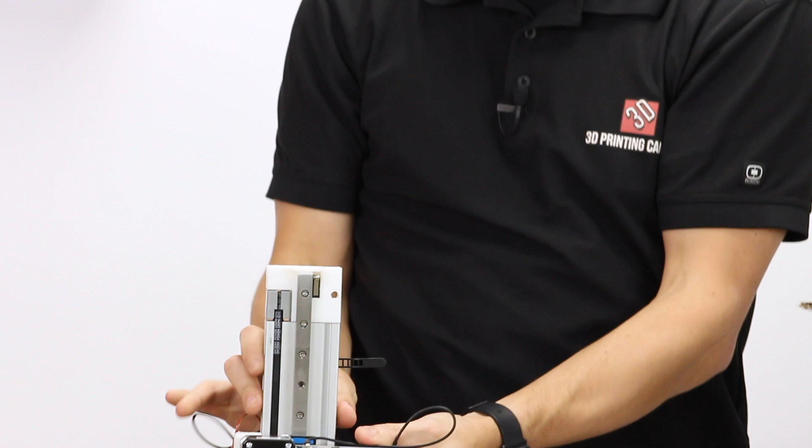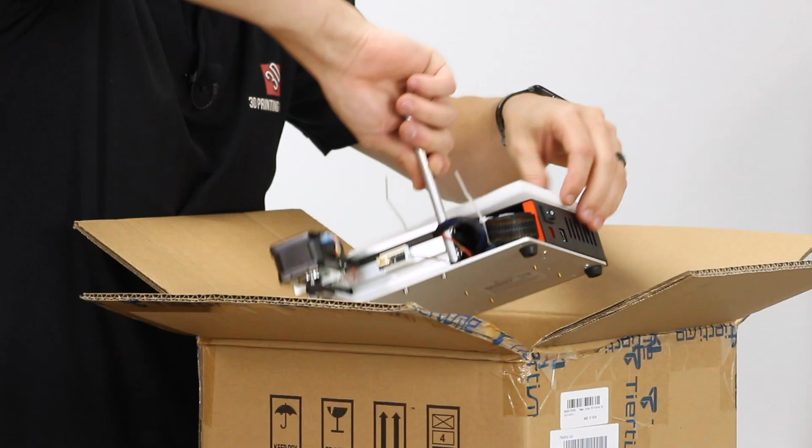All right, so this is kind of that cantilevering. So this would be the Z like this. And you'll notice that there's linear rails on both the Z and the X. It's pretty heavy. And this will be the rest of the base. Obviously that's the control box. And again, we have a linear rail on Y. So everything is linear rails, we have no V-slot wheels or anything like that here. And that's the end of that.

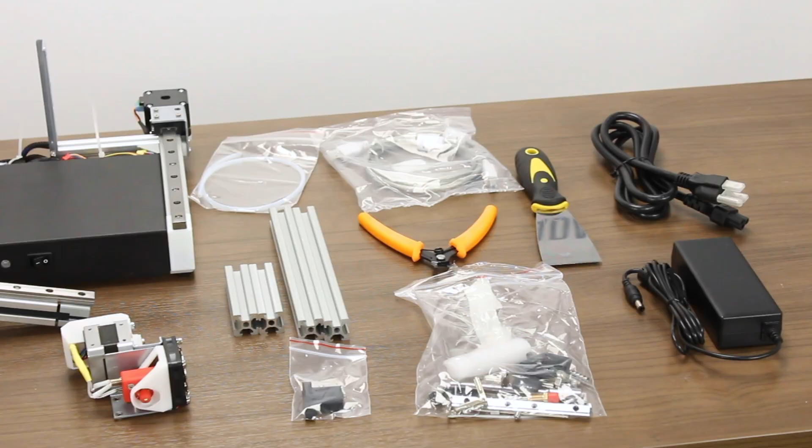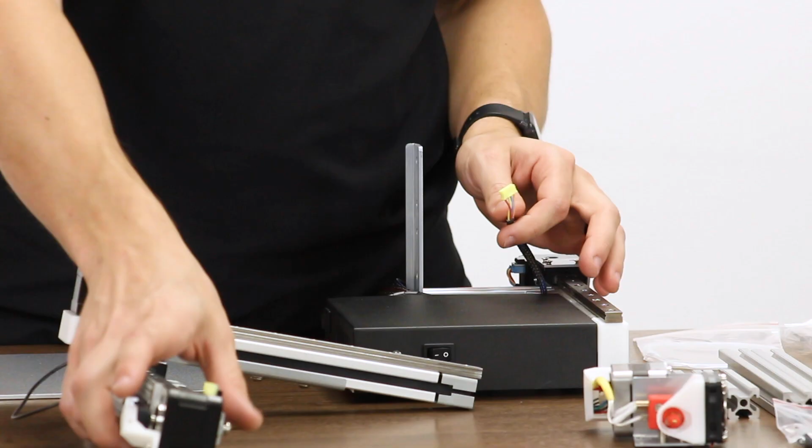So I've cut the zip ties that were holding all of these wires nicely bundled in little coils at the back here, the longest being the one that's going to reach the hot end. It's this ribbon type connector, so that's pretty obvious. But what we're looking for is the Z motor cable. They've nicely actually color coded this. So the Z motor on this assembly here is this guy, and it's yellow, and this one is yellow here. So that is going to go into there.

So on the Z axis here, there are 3 screws loosely screwed in here, and those correspond to 3 holes on this upright bracket. So we're going to use these screws to attach this to here. Make sure that you're not pinching any of these wires between this upright piece and this piece here. So to do that, I'm going to need some of these Allen keys, I guess.

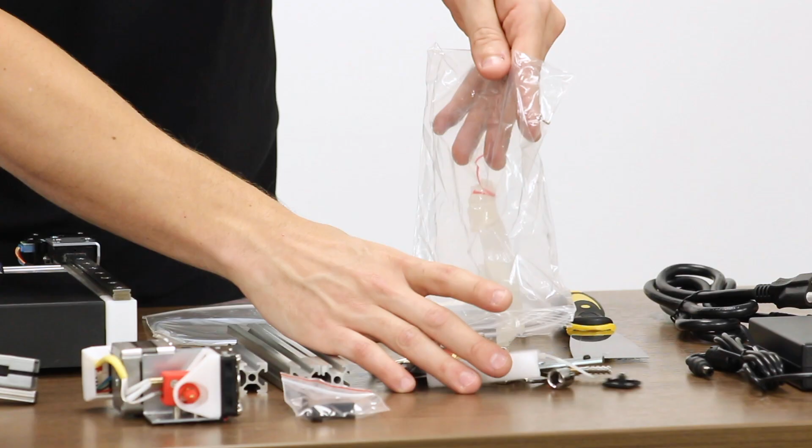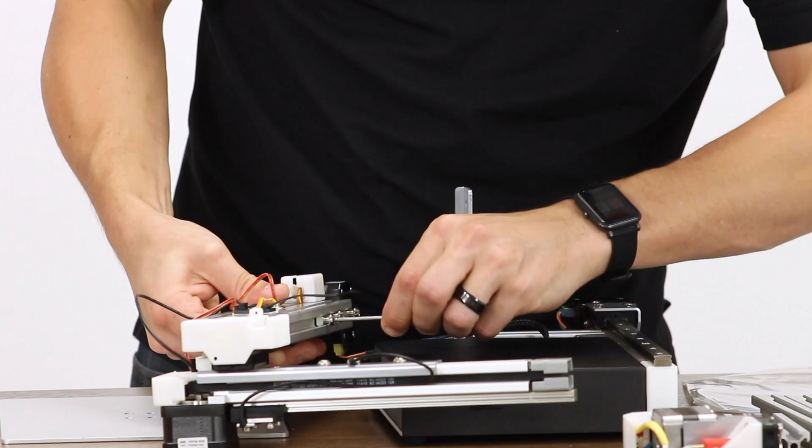Quite a few little parts in this bag. Oh, that's kind of nice, they give you a little wrench for the hot end, the nozzle I mean. Well, what we're looking for is this one. So I actually don't need the Allen key out of that parts bag because these are Phillips head screws. I just immediately assumed they would have been hex head.

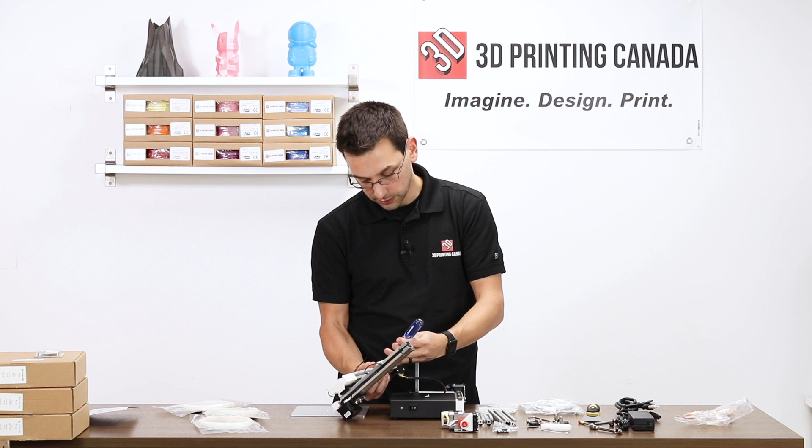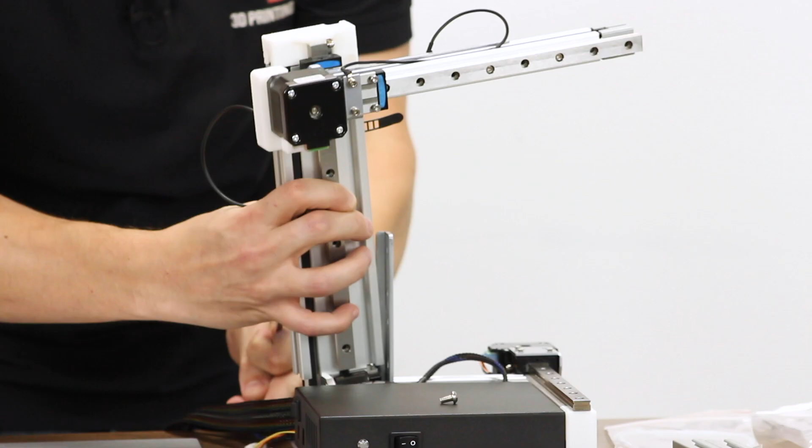So remove the screws from the upright. I'm following the instructions verbatim. It would have probably made more sense to attach this first before attaching the cable to the motor. Though getting your fingers in there to attach the cable afterwards would also be pretty difficult, it's pretty close quarters. Okay. So as I said, you got to take some care to make sure you're not crushing any cables underneath there.

All right, so I've got that connected. It's good and sturdy, that's for sure.

So the next step, it says we need to take this red cable and plug it into the Y motor. The Y motor is already connected. So what they actually mean is the X motor, and we know that for sure because they've color-coded it like the other one. So it does say to route it through this little plastic bracket here.

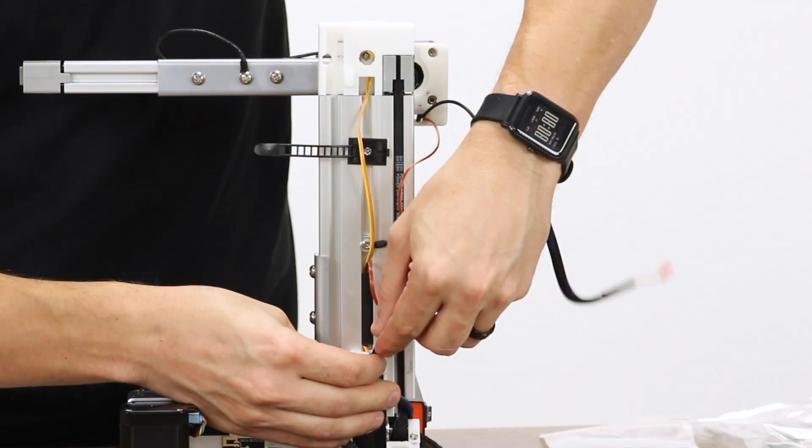And then connect it just like that, I guess. Right now the Z is basically all the way at the top, so we know that that's as much slack as it's going to need, and then as it comes down it will just kind of fold over on itself.

So now they say to connect the YZ end stop cable, well that's got to be this guy, it's the only one we have left, and it's going to connect to this little connector at the bottom of the printed bracket here.

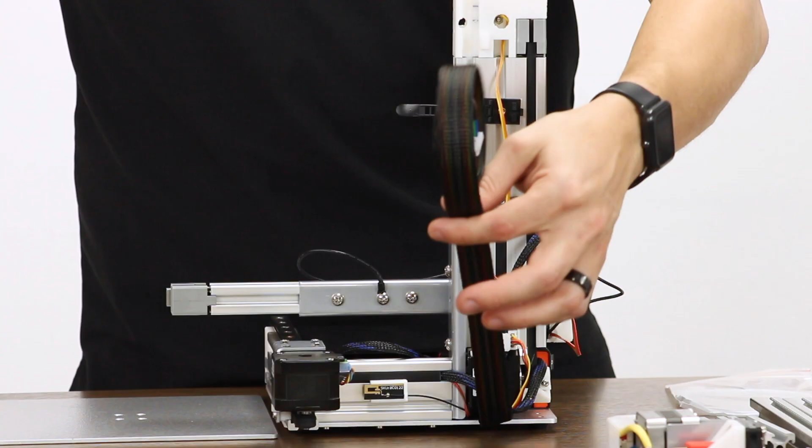There we go. So the next step is we're going to route this ribbon cable here. You need to slide it underneath the Z motor, and then it says to run it up here and use this cable tie to kind of cinch it.

There we go. And it doesn't need to be tight or anything, you're just doing that to stop it from kind of folding over on itself.

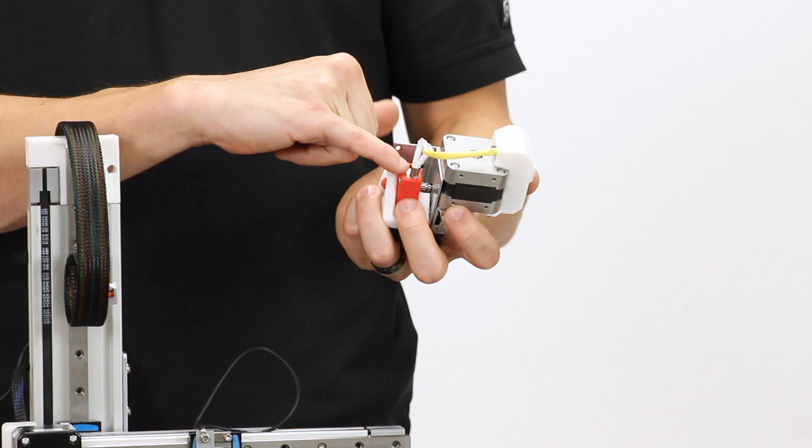So now we're ready to attach the hot end to the X carriage here. So there's just these two hex bolts, and they're going to bolt through these two holes in this metal back plate. Looking at this a little more closely, it's interesting how far out both the thermistor and the heater cartridge stick.

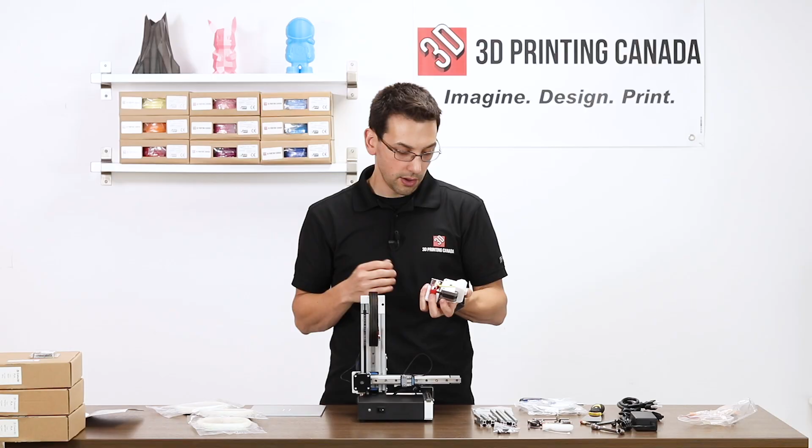I'm going to assume they're pushed in the correct amount, so they just may be longer heater cartridges than we're used to. And there seems to be some sort of a paste, maybe it's boron nitride or some sort of high temp thermal paste to help with that heat conductivity.

So as I said, two hex bolts, and just bolt through these two back holes in this bracket. You may need to manually lift up the Z. It will sag on its own over time, but otherwise you won't have the clearance necessary to bolt this on.

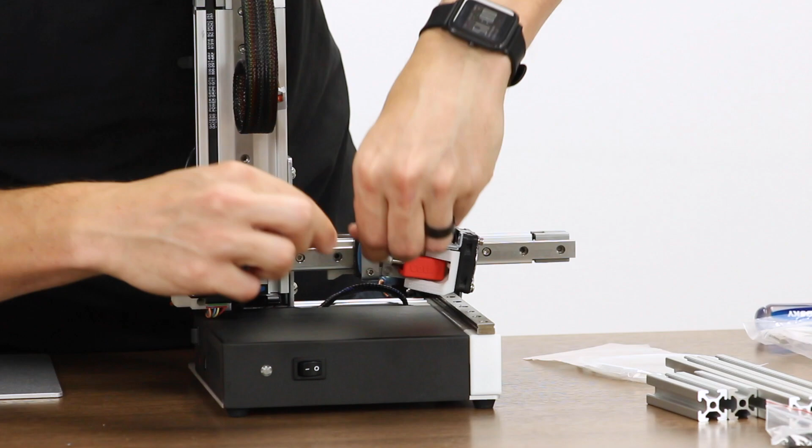All right, almost looks like a printer now. So we can connect the ribbon cable. It is keyed, it only goes in one way. Let's route it like this.

So when I connected the X motor cable, I forgot to tuck this into this little printed bracket here. So you should be able to kind of, there you go, nestle the cables in there like that. They're not going to slide out on their own.

That's fine. So the next step is to assemble the spool holder, which is made up of these 2020 pieces, but we haven't put the bed on the printer and there is no mention of installing the bed.

This is the bed. It has these recessed holes for the bolts. They're pan head bolts, or these tapered bolts, sorry. So if we raise up the Z again

and move the Y forward here, the screws are already in here. There are 3 of them. The 4th here is completely recessed into this bottom bracket, so I don't think that's to be removed. So we'll just use these 3.

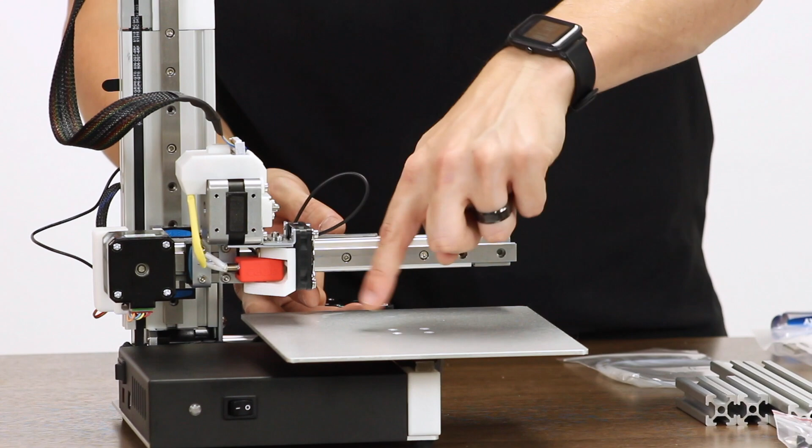And the bed's going to sit like this. So just rotate it until you can see that they line up. It is interesting that there is actually a fourth hole in the bed, but a different screw in that fourth hole.

That feels really wrong to leave this fourth hole here with nothing kind of filling the recess, but it is what it is. That other bolt is completely flush under there.

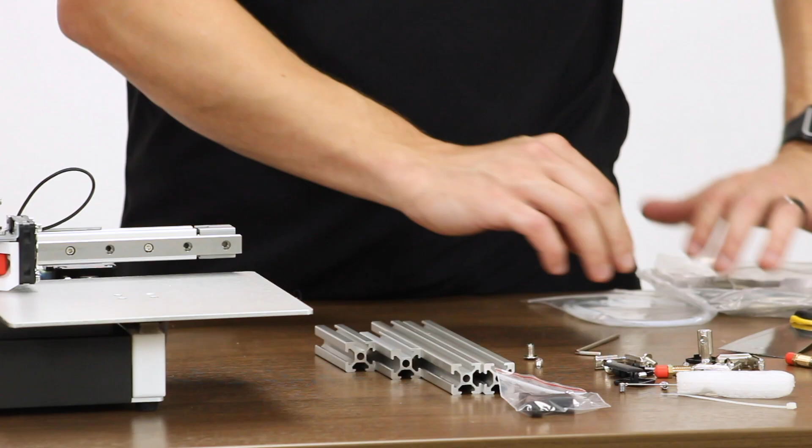So now we can move on to the spool holder. As I kind of mentioned, we've got the 2020s. We also have the caps to kind of finish off the ends of those. And then we have these little angle brackets.

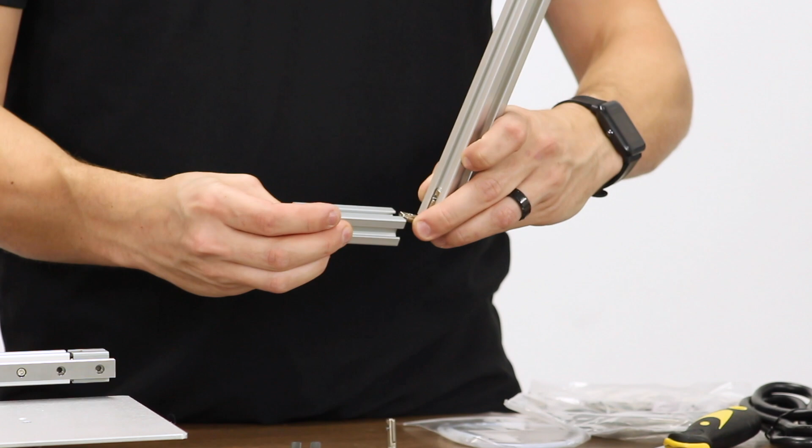So if you're not familiar with these, they slide in like that, and then you put a screw in there and that kind of pinches it between the back, the inside of the 2020 there, and puts pressure outwards. And then the other side would obviously slide into something like that for a 90-degree corner.

So the spool holder generally gets assembled like this. Put this tall piece there, put one of these pegs facing that direction, and then the other one facing the same direction. Not sure if this goes on top. Nope, it goes like this.

And so then your spool will sit on top of here. So I'm going to insert these angled brackets. That. And I should be able to just slide this one right down on top. That. And then just so they don't fall over, I'm going to bolt those on.

So we have these little grub screws or set screws. You can almost think of it as an Allen bolt without a head. And that's what we're going to use to put that pressure that I mentioned.

So I've got the main upright connected and it's super rigid. Not that it really needs to be all that rigid, it's just a spool holder. But it just goes to show you that these brackets do work quite well. So this bottom one, obviously I can't connect it like that - that doesn't make any sense, but I can connect it like this.

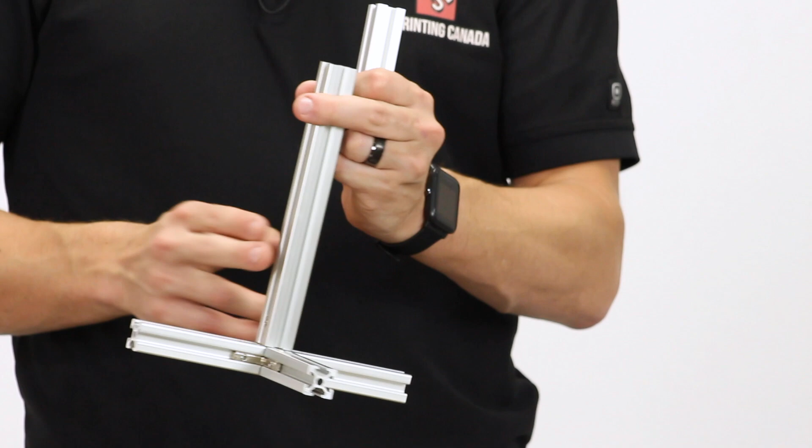And so on this upright here, I did connect two corner brackets, one on either side, but on this one, as well as this other small one, I'm just going to use one. That's all they give you, is enough to use one on those, but it makes sense that that's where you would kind of skimp, because there's really not a whole lot of force, not the amount of force that would be placed on this taller one.

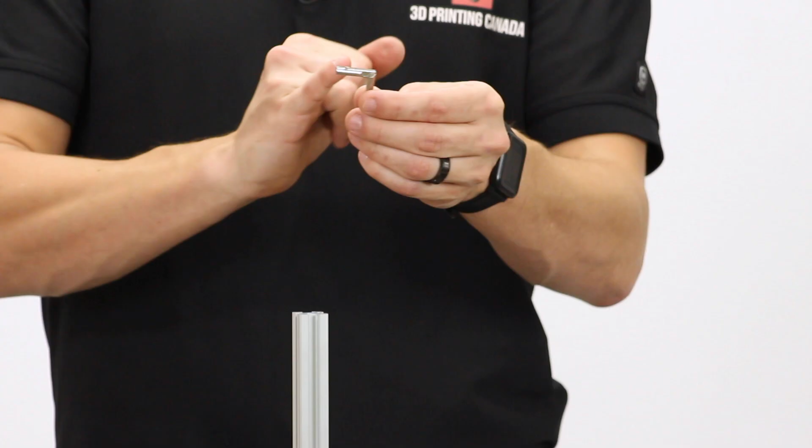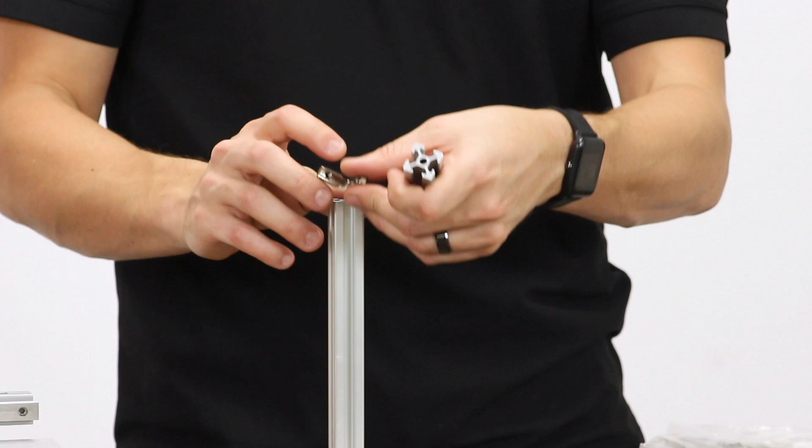Interesting - you'll notice also that there's a little notch out of here, so that allows this to slide in the end like that. That notch only exists on one side of the bracket, so I just tried to install it like this, and that won't go. So it would need to be - third time's a charm - it would need to be this way. We could also put it on the underside if we wanted to hide it a little bit more.

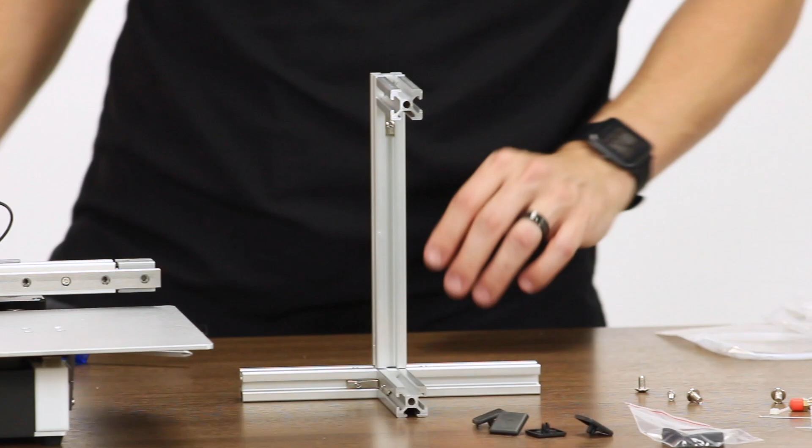There we go. So I immediately regretted all of that I said about using two brackets on the upright. While it is true that the upright would experience more forces than the rest of them, we only have enough brackets to do what we need to do. The last bracket needs to go something like this to stop the spool from just sliding off the end. So I'm gonna have to pull one of these two brackets out.

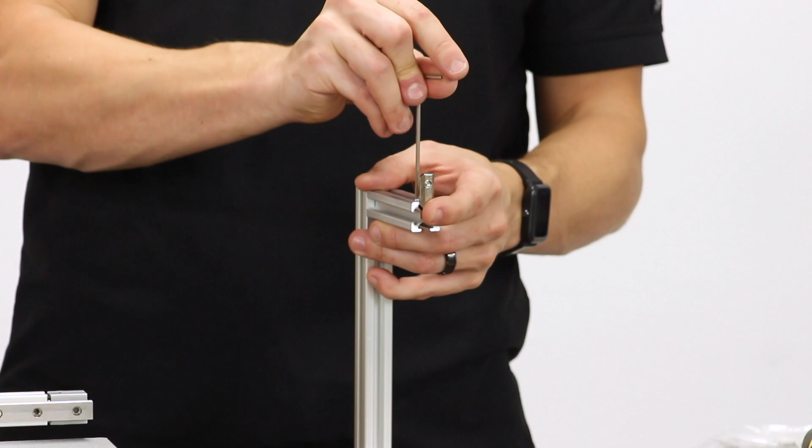So now this bracket is just going to go like that. And I guess we really don't need the grub screw in this top hole since it's not doing anything anymore, so we have an extra.

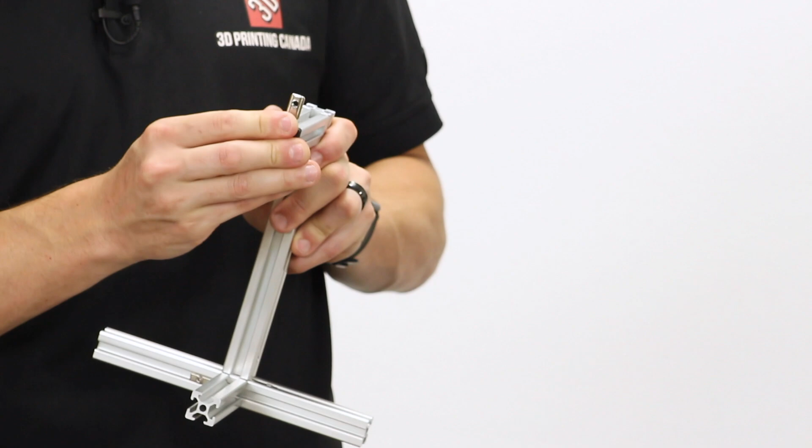So if you slide this bracket in enough, then you can put one of these caps over the end to give it a little bit more of a finished look. It should just snap right in there. There we go. And then same with the other ends.

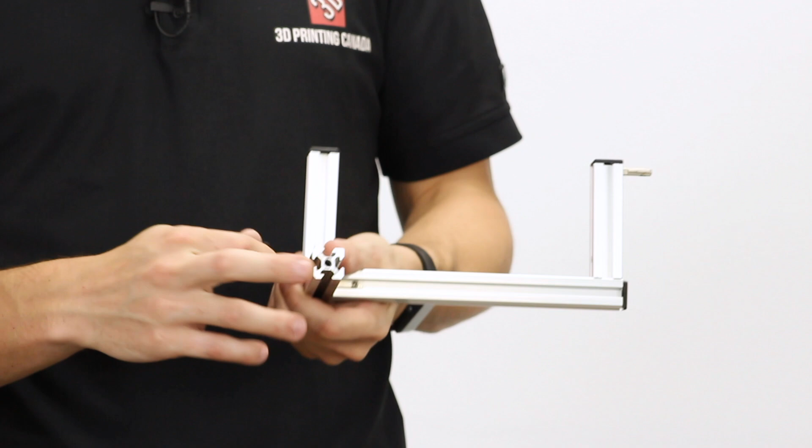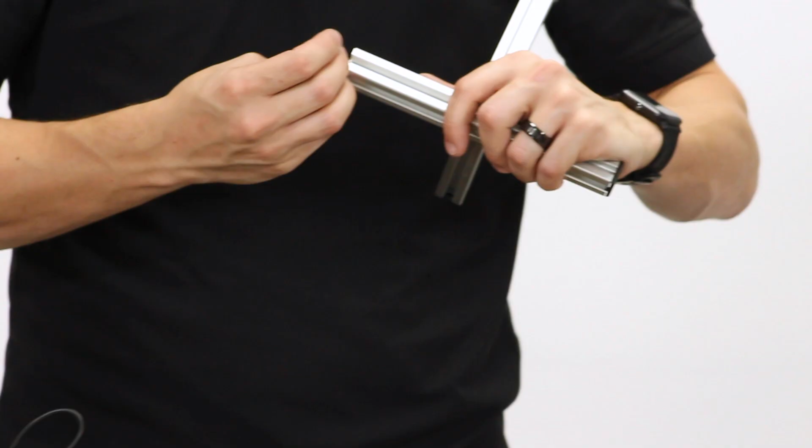So there were enough of these plastic caps to cover all of the ends of the extrusions here. What I noticed is as I got to this last one, this one hole is tapped. I didn't notice any of the others being tapped. Like if I pop this off, it's just a smooth hole. I'm not quite sure why that's tapped - it makes no mention of that at all. I thought maybe this is supposed to bolt onto here somewhere, but for now, I'll just stick a plug in it.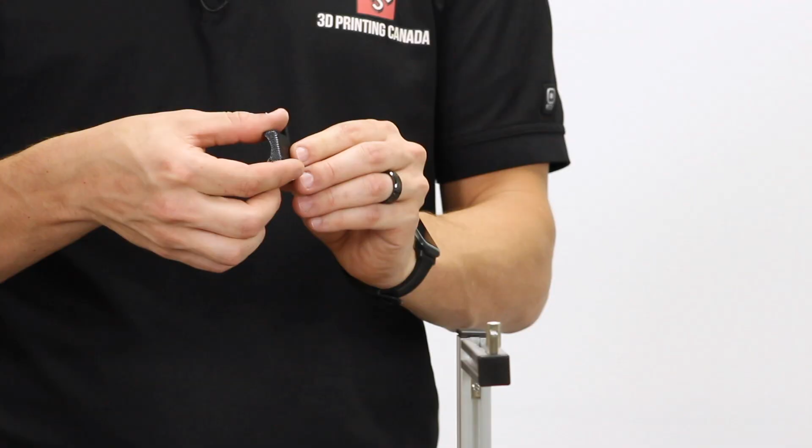So we're left with some spare parts, which is kind of always the case. But in this bag, remember earlier on, I mentioned this like curved little bracket of sorts - I'm not even sure where this goes. There's no mention of this in the parts list in the manual, and nothing in the installation instructions about it. So I'm going to take the 2 bolts and throw it back in this bag. Maybe as I spend some time with the printer, I'll learn where this is supposed to go. For now, it's a bit of a mystery.

I didn't mention it, but we also have one of these little needles for helping clear a clogged nozzle. I don't really use those myself. And in the box with the printer, there were 2 spare nozzles, one installed, so there's a 0.4 installed, and they give you both a 0.2 and a 0.6, so you can go a little bit larger as well.

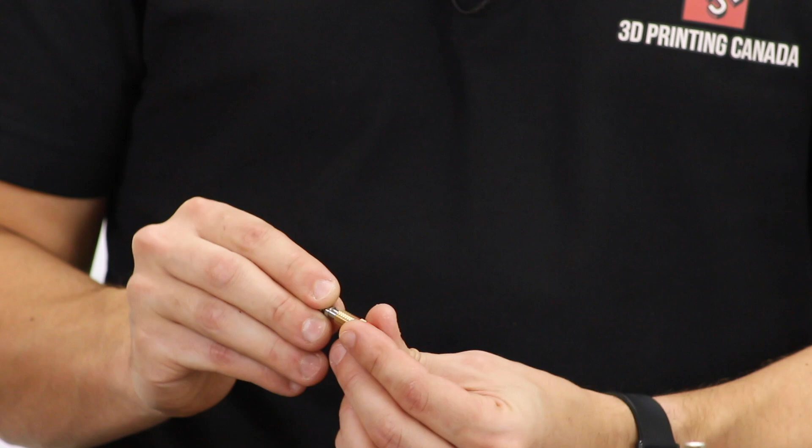So these nozzles, there - as I mentioned, there's more of the nozzle tip exposed to, say, the airflow than in another nozzle style. So they have these nice silicone boots that go right over the tip, which is kind of cool. And directly attached to the nozzle is this heat break component. It's tapered to help steer the filament in. 1.75 millimeter filament is most of our printers, but that's kind of a unique design that it's all in one.

So according to the installation instructions, that's all we need. We would probably want to be able to steer the filament into the hot end. So the filament is going to be, say, over here, probably overhand, and we want it to go in here. So that nicely fits that. There is also a spot on the back here where this can go, like this.

So it just slides into here. And then if we had the spool kind of behind, we could do it underhand and up and through. This is really just to guide the filament.

If you had some sort of a setup where you had this on a shelf up here, you could very easily just let it go down to the top, which is how I run most of my direct drive printers.

So I think I'm ready to go away for a little while, get my hands dirty with this guy, and then we'll come back and we'll review the software aspects of it, as well as my initial first impressions. Looking at the printer, it's clearly like a minimalist design. You'll notice there's no screen.

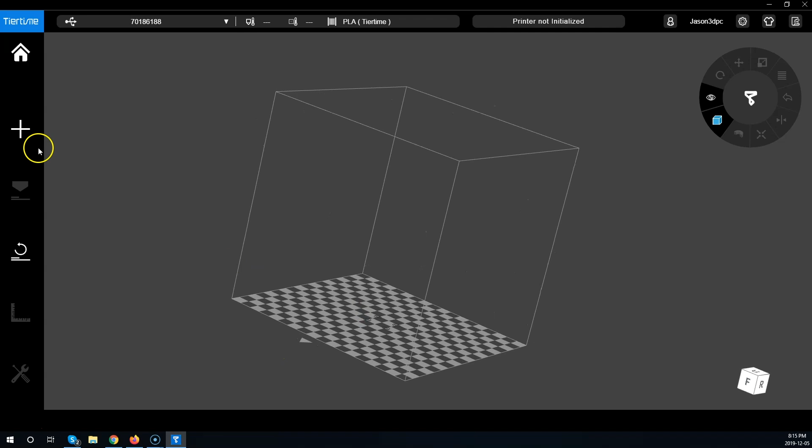And then we'll go to Up. So this is kind of your slicing environment. You can press plus and you can add a 3D model from STL or a 2D picture, or some kind of primitive shapes. So here is this guy. It's obviously going to be a little bit flat on the bottom, but that's fine. And there's quite a steep overhang there. And you can actually see a visualization of those 4 screws, so you want to avoid them as much as possible.

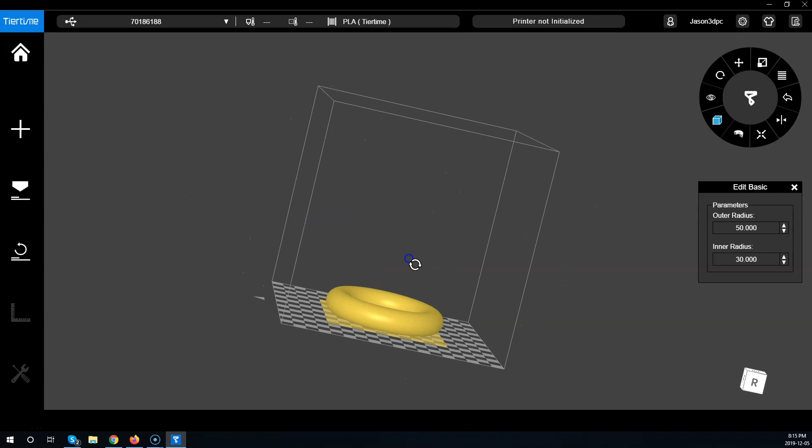We have some options over here. We can kind of view it in X-ray form, kind of thing. View it back as a solid. We can rotate them around the different axes. We can translate it or move it. Kind of all the standard tools you would expect to have are available over there.

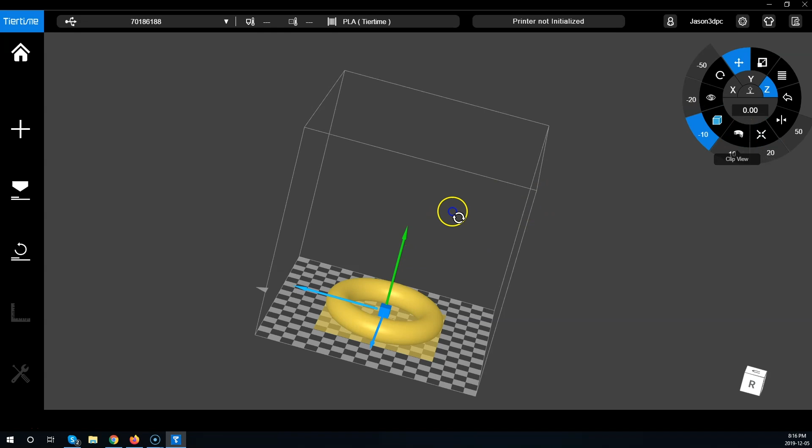And then if you're going to print, we've got some print options. So you've got quality, which is fine, normal, and fast. It's not clear to me up front what exactly quality means, whether it's slower because it's not related to the layer thickness, which is a separate metric here.

Then you kind of choose your different infill from some presets. I think this is probably more than enough, 20%. And you can choose like where the infill shows up, so you can just say no infill, you can say no infill top or bottom. There's 13%, 15%, and then 20. So we'll leave it at 20. I'll leave it at fine.

I've already calibrated the Z offset, but this is kind of how high the Z is, 182.6 millimeters. We're not going to use a raft, and we're not going to use support.

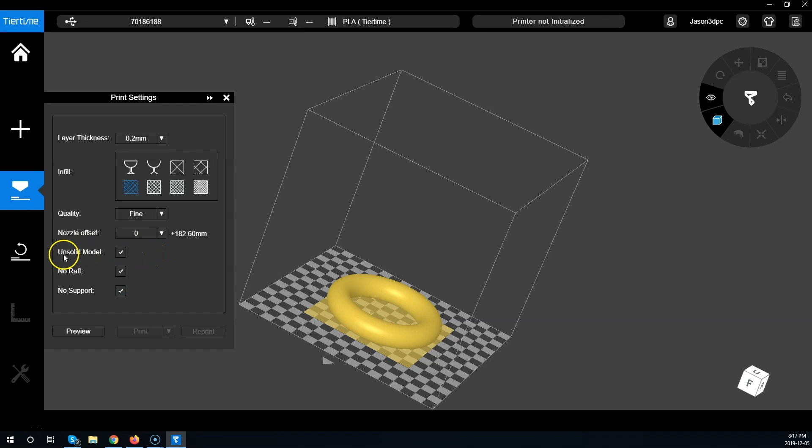Before we can actually print, you can preview it, of course. Before we print, though, you need to initialize the printer because it doesn't know where the head is right now. So you can hear that beeping, and it will actually home all the axes. So it'll move all the way to the top, which is homing the Z. 0 is actually at the very top, really, and it'll home the X and the Y, the build plate.

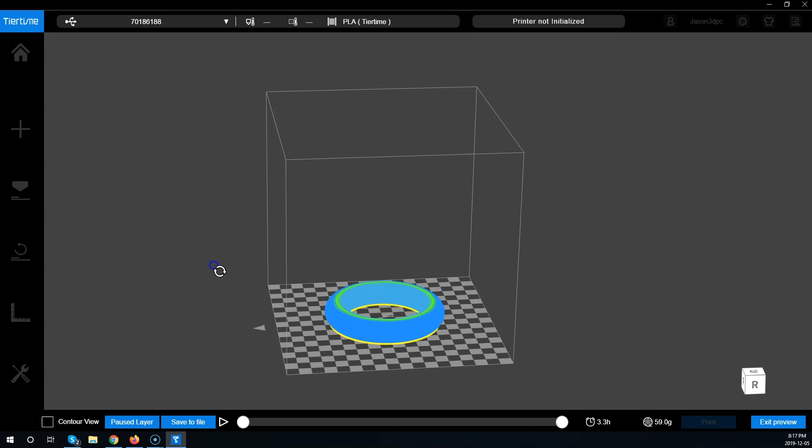Once it's done initializing, as they call it, then we can actually send it to the printer to print. It even gives you a warning up here that the printer is not initialized. You have different material profiles as well, so we're just using the Tiertime PLA, so we're using the profile for that. If you were using a different material, you may want to configure a separate profile for those settings. And then you would just hit print. And you can see the hot end heating up, right here, heating up.

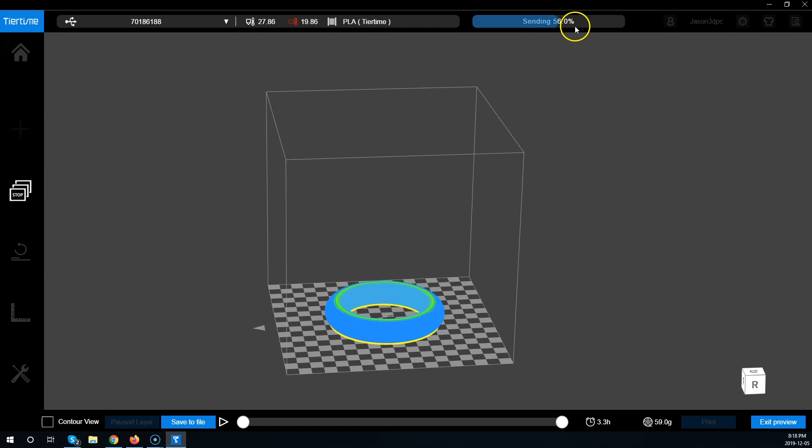It sends the entire print file to the printer as a cache, so it's not streaming it layer by layer from your laptop. There we go, so there's the hot end heating up, 34 degrees and climbing. In a couple hours we'll have this shape printed to inspect.

I mentioned calibrating the Z offset and such - that's actually done in the calibrate section. But if we look at maintenance, we can extrude material, withdraw, stop the motion on the extruder. We have a coated build plate, as we mentioned. The nozzle diameter stock is 0.4, though it does come with other diameters.

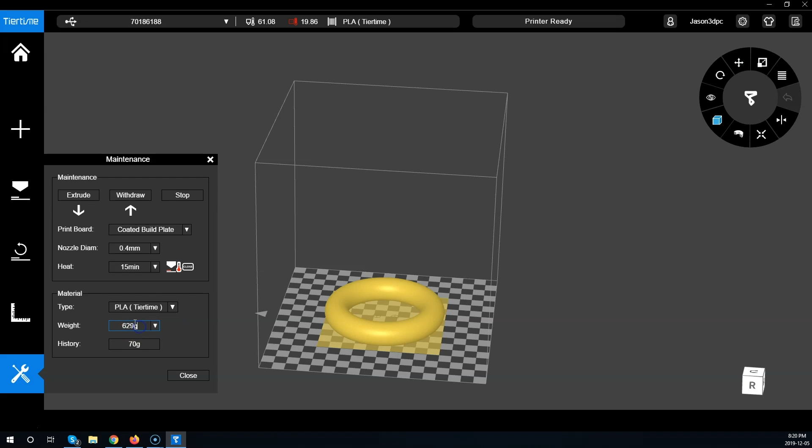Not sure off the top of my head what the heat 15 minutes setting does - whether it turns it off after 15 minutes, or heats it up for that period of time. The material, as I mentioned, was Tiertime's PLA. There are a couple other options here, and you can customize your own material profiles. It has been keeping track of how much material I've used - we started with a 700 gram roll, and now we have 629 grams left because we've done 70 grams worth of printing. That's not just this one item, we've done various prints at this point.

If we look at calibrate, this is where we can set a manual mesh bed leveling, if you think about it that way. You can set what the delta is at these different points on the bed. Our overall Z is 182.6, but we can have a different offset at these points - it needs to be 0.6 more, 0.3, 0.1, etc. Since we can't manually level the bed, we have to do it synthetically, through software like this.

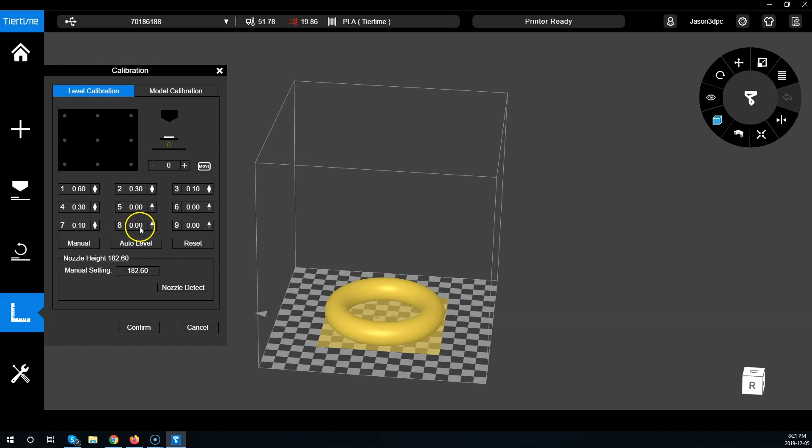At the top here we see that serial number, and we are connected through USB, but we have the ability to do this through network and print without cables. Under printer, this icon brings up some settings, and you can choose the SSID for your Wi-Fi. Obviously we'll just choose one at random, put in your password, and hit confirm.

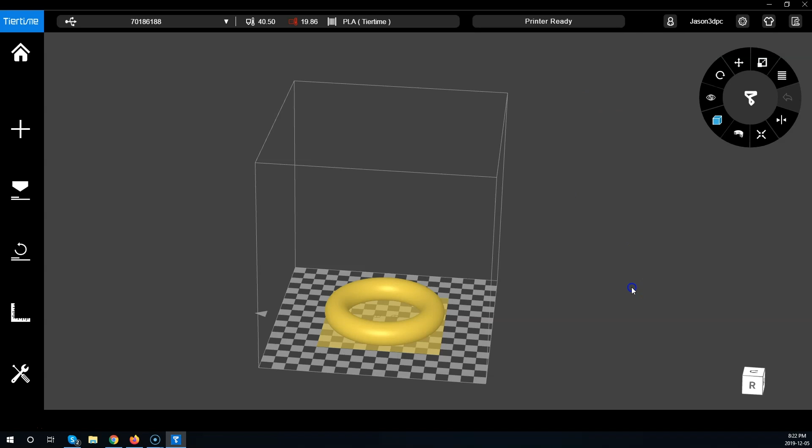It will actually connect the Cetus to your Wi-Fi, and at that point you can just unplug the USB cable. Every time the Cetus is turned on, it will automatically reconnect, and the software will find printers on your local network if you're connected to the same Wi-Fi SSID. Instead of saying USB, it'll show that it's actually network connected, which is a fun way of printing if you haven't experienced that before.

All right, so here we are with the resulting prints. Like I said before, it's a very different experience than we might be used to. One of the things that's interesting is how the slicer actually accounts for the screws in the middle of the bed and shows them in the visualization of the bed in the slicer. I, of course, paid no mind to that.

So some of the bottoms of my parts have the shape of the recessed areas for the screws in them, so they're not perfectly flat. I also ended up making a bit of a mess of the bed. I was concerned with it not being a heated bed about the adhesion we may or may not have with the filament, and that was not a problem at all - it was actually the inverse. I had to hack away at it with a scraper just to get the thing loose. It's a lot easier when it was a raft.

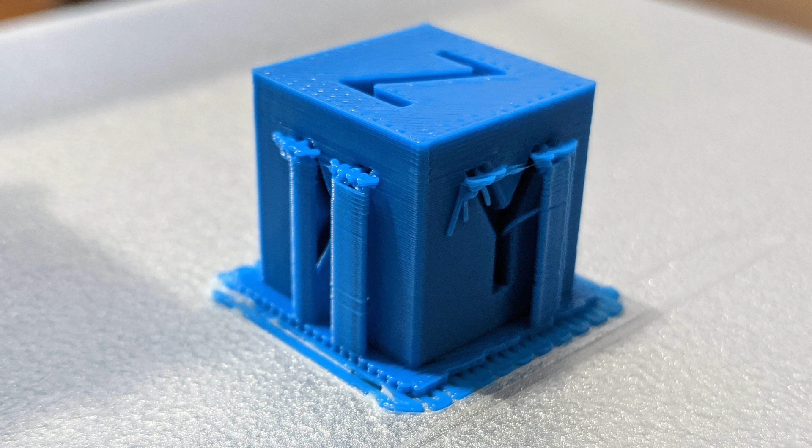The first cube I printed here was 20% infill, the lowest preset amount of infill they had, with 0.2 millimeter layers, and I have no complaints. I forgot to turn off the support generation, so there were supports, though we know this doesn't need any. I just peeled away the supports, and on the bottom we have that typical surface you're left with when it's printed on top of a raft, where you can see the individual lines a little bit.

But the top is pretty good. There's a good amount of connection with the outer walls, minor gapping there, so maybe there could be a bit more overlap, but I didn't really go too much into the slicer to figure out what options I had available in that regard. The other cube I printed completely hollow, and I really just wanted to see how it would turn out.

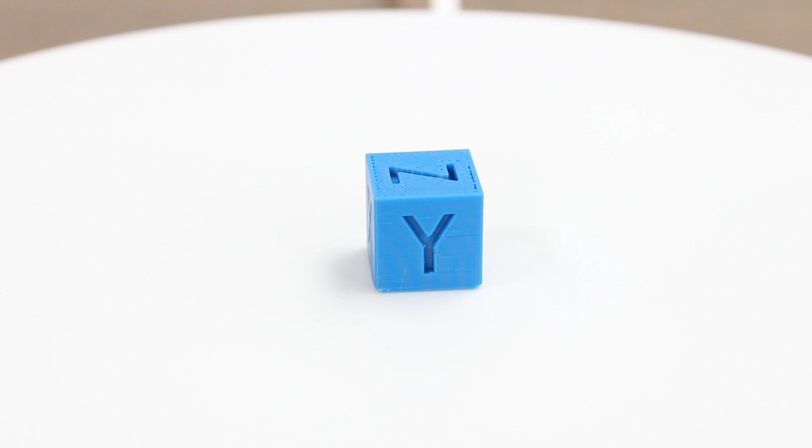I also printed this one using the fine preset - it's still 0.2 millimeter layers. I think it prints slower, I'm not entirely sure, but definitely the surface quality of this one on the walls is better than the first print I did. And obviously we weren't using any supports at all this time, which we didn't need.

I didn't print it on a raft, so this one also has the marks from the holes in the middle of the bed, and I had to chisel it away from the bed surface. Since I did no infill, we're bridging the entire top, including the inset Z there. As a result, it didn't really connect to the walls well at all. But I'm not faulting the printer for that.

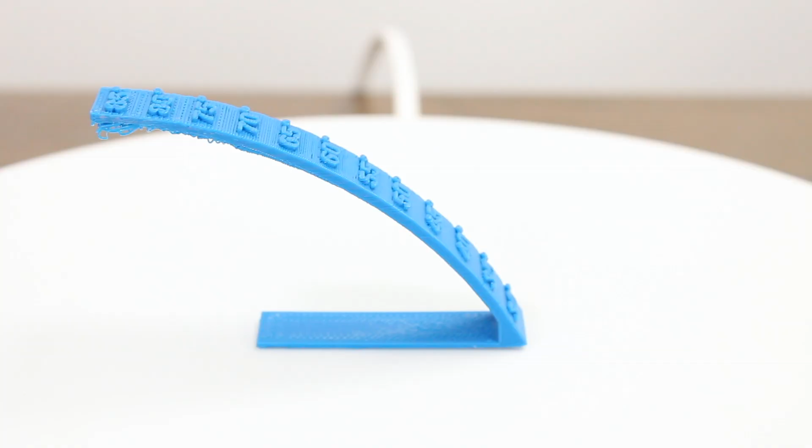That's completely user error. Then I did an overhang test. This again, no raft, so it's got the holes. And it did pretty well. I would say that on the bottom here, it's acceptable up to probably 60 degrees. If you weren't super concerned with the surface, you could do 65.

So the cooling shroud there, much to my surprise, works a lot better than I expected. The fan here serves two purposes. It's blowing past the cold side of the nozzle, that unique kind of heat sinky-ish design on the top portion of the nozzle. But this shroud here redirects some of that airflow into a circular fan shroud right at the nozzle tip, and it seems to perform pretty well. I'm not a huge fan of these kind of 2-in-1 fan designs. I much prefer to have control over a separate fan for part cooling versus the hot end cooling fan. But in this case, that's what we have, and it works.

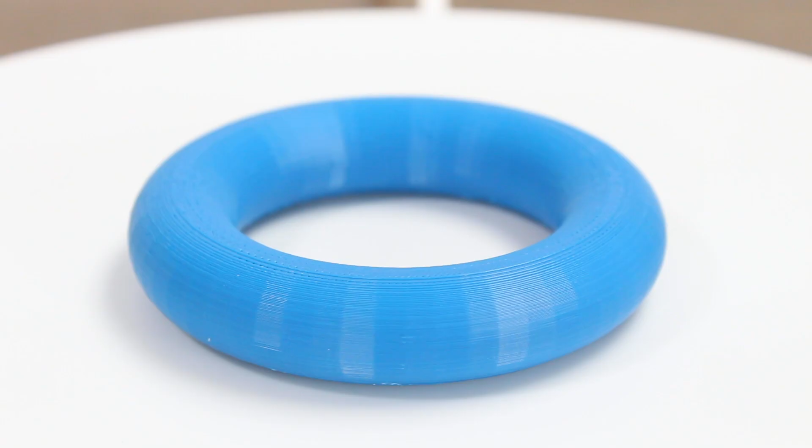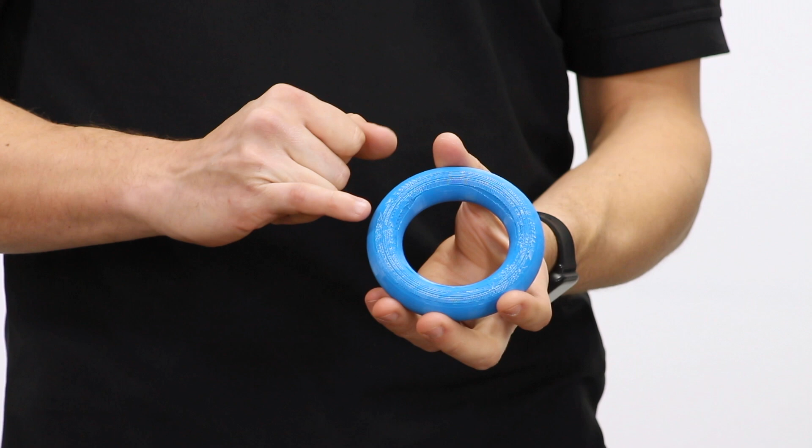Then I used that neat option in the slicer there to just grab a primitive shape and plop it on the bed, and so that's what we're left with here. It turned out well. It was printed on a raft, and so I peeled away the raft, so we do have some rough surface here. And because of the steep overhangs, some of the lines here didn't really attach, so they were just stringing and left hanging, so I ripped those off. But other than that, it turned out quite well. Took maybe 3 hours or something to print this, so it was printing rather slowly.

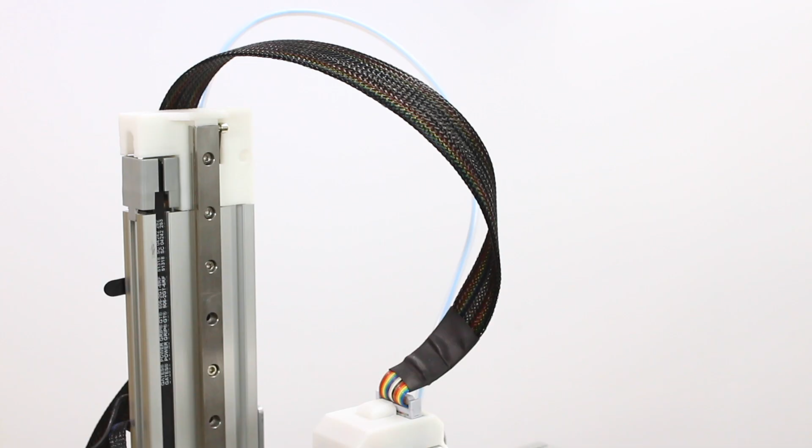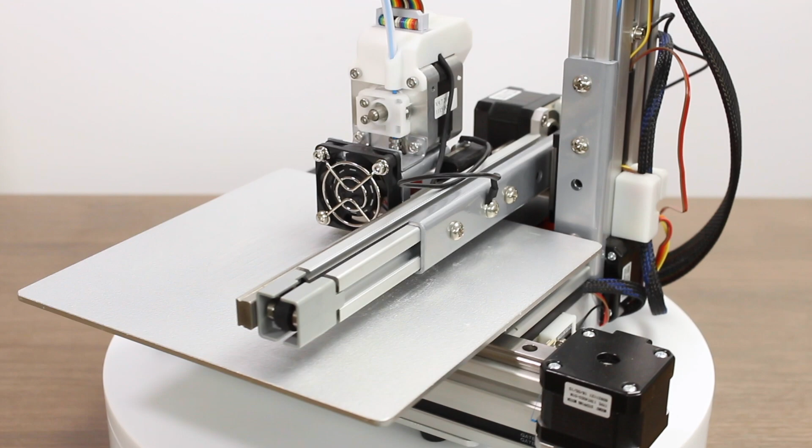So where does this printer fit in? Why would someone buy this over maybe an Ender 3 or something? I think the biggest benefit, aside from the fact that it's built with very quality components, is the Wi-Fi and the way that it integrates with the slicing software. Their whole closed ecosystem works very well with their parts, or their printers. And you can have multiple printers, so you can just pull it from the drop-down list at the top and select, say, one of 10 printers in the front of a classroom or something. I think that would be useful, where you have students in a class at various stations and they can just pick a printer and send a print job to that printer. It may be a great educational tool in that regard.

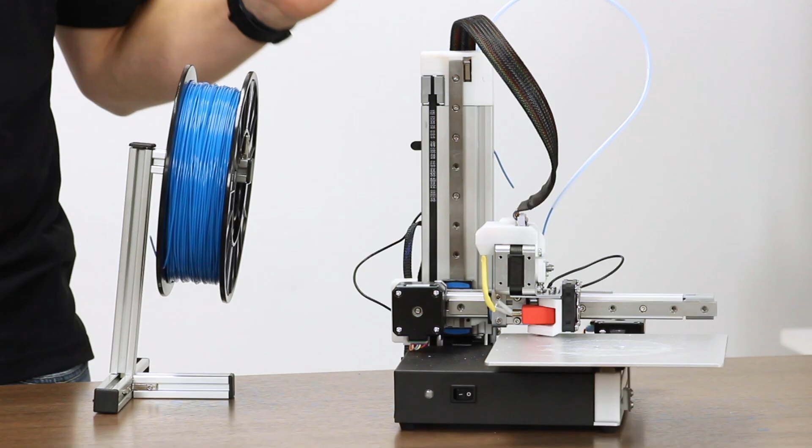It's quiet. It's not 2208 or 2209 level quiet, but it doesn't play music like you might hear in the background from another machine that's printing. It does make kind of a tick-tick-tick noise from the motors, but it's not disruptive by any means. The fans in it are quiet, and they've obviously chosen good quality components.

I mentioned that a second ago. These are Moon's steppers, which are supposed to be very high quality steppers. They have Gates belts, which we've seen on some other machines. And of course, we're using linear rails on X, Y, and Z. They're not Hiwin, I'm not exactly sure the brand, I'm sure I could look it up. But there's no slop or play in the carriages as they roll up and down them. And we don't have to worry about tensioning the wheels or the wheels wearing out over time and replacing them. So from a maintenance and serviceability standpoint, these should pretty much be good to go. Nothing for you to worry about there.

I think it's neat. I'm not a huge fan of the spool holder, but that's really a minor gripe. But it was something different and a unique experience.